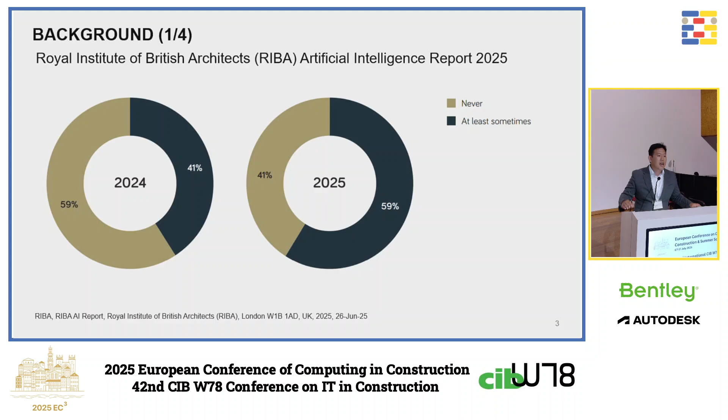According to the AI Report 2025 from the Royal Institute of British Architects, almost 60% of design firms are already using AI in their daily practices. Also in academia, in the recent decade, there have been extensive studies conducted to automate the design processes, not to replace, but to support.

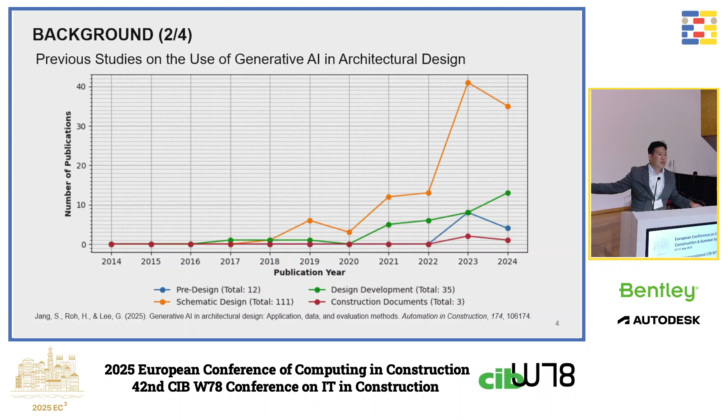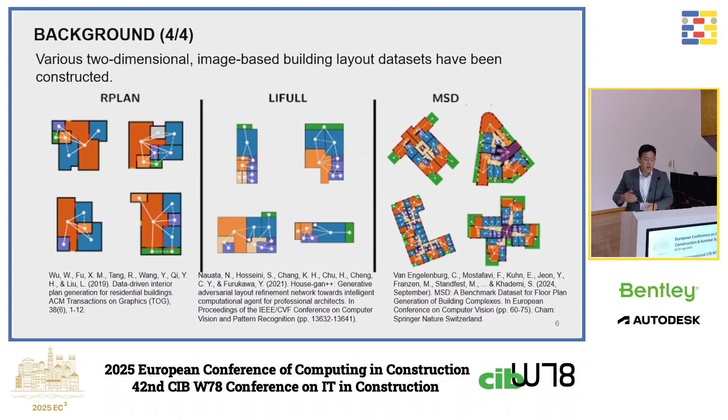But the main focus, almost 70% of the studies, was on schematic design, and particularly building layout generation, which accounted for the largest share of the studies. Various floor plan datasets, including RPLAN, LIFULL, and MSD, were constructed to support this area where building layouts are interpreted and generated, and there has been much dedication from researchers.

However, we still have remaining challenges in utilizing these floor plan-based images to interpret and generate building projects, because image-based plan data often lacks the vertical context and is limited in representing complex variations and configurations of spaces and programs, since we often have multiple floors in a building. And first of all, we have to label the rooms and connections within the images, and that's labor intensive and also error prone.

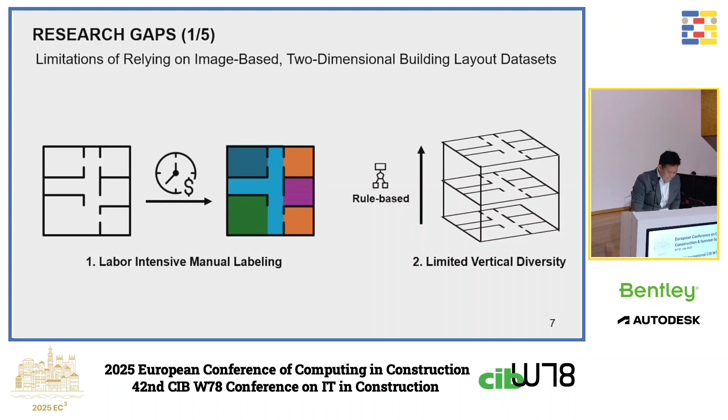So why do we have to make these building descriptions? To provide some background for those who are not familiar with image captioning and generation: nowadays we train generative AI models using extensive datasets of images and their paired descriptions, which we call image captions. In image captioning, we input an image to the AI model and get a relevant description out of it. Conversely, when we give a description and get an image, that's image generation.

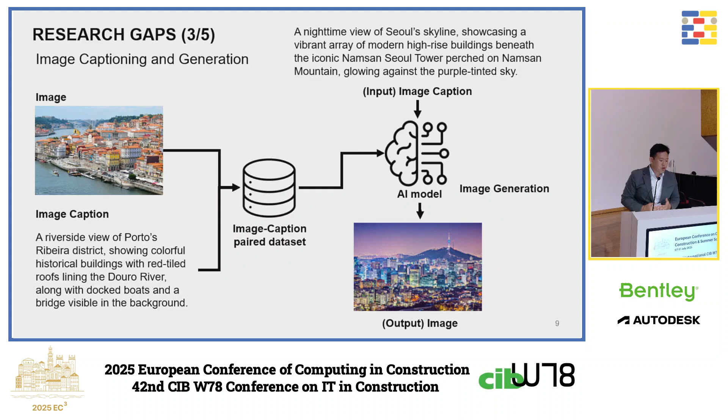So the long-term goal of our project is to enable AI models, given only a description of the project we want, to produce BIM models in the early stage, like LOD 100 or 200, so I can apply what I proposed in my thesis for design detailing automation.

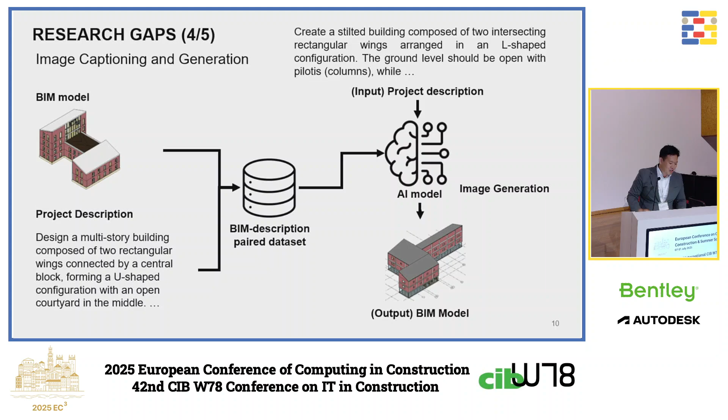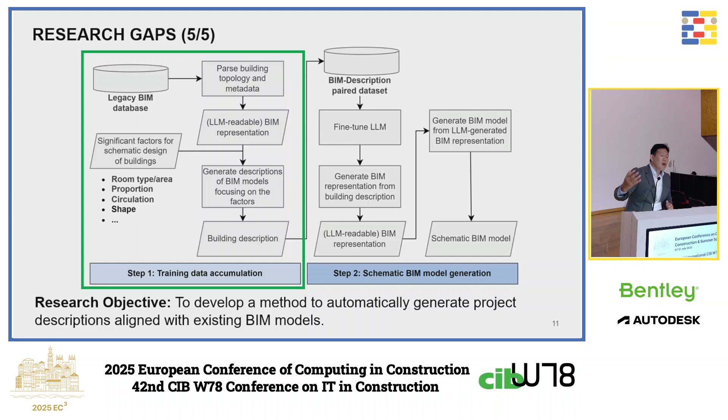Today's presentation is more focused on the earlier stage overall, which is developing a method to automatically generate project descriptions from BIM models that we already have. For example, as was just shown in the last presentation, we already have plenty of BIM models, and now we can utilize them to train AI models.

The proposed method comprises three steps: extracting topological and programmatic metadata, structuring it for LLM interpretation, since I use large language models to make the descriptions, and finally generating building design descriptors relevant to the design characteristics we are interested in when making a new project.

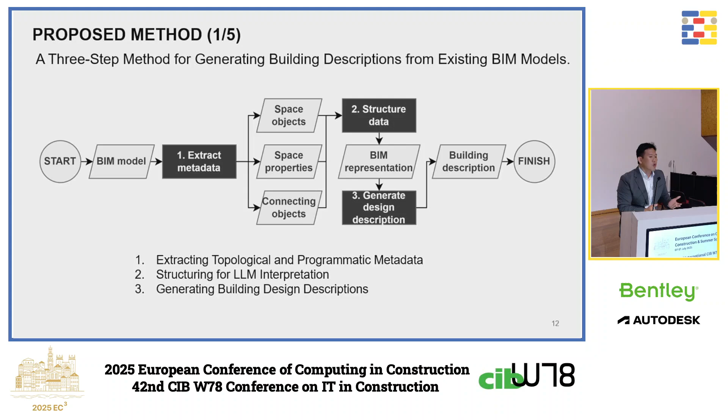So briefly explain the first step. We extract the spatial elements and the connecting elements, which here are windows, doors and stairs, which interconnect spaces like indoors and outdoors, vertically and horizontally.

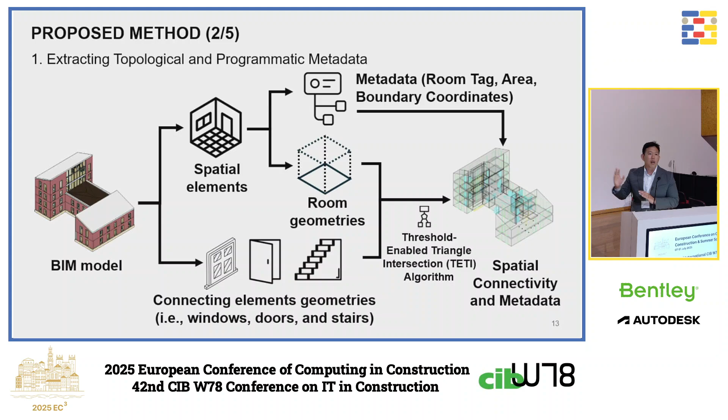And then we parse metadata from spatial elements and also geometries. For the geometry calculation, we utilize a threshold-enabled triangle intersection algorithm, which is just an efficient mesh intersection calculating algorithm. And then we parse the spatial connectivity that is labeled with the metadata.

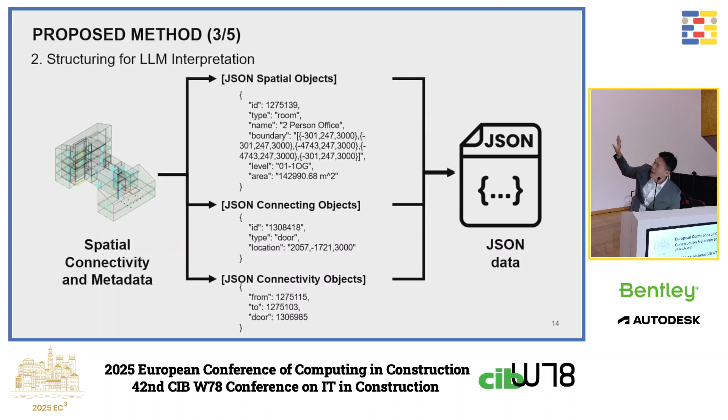Then we utilized JSON as a data format, in which we represented the spatial elements, the connecting elements, and the actual connectivity parsed from the algorithm, all as one JSON file.

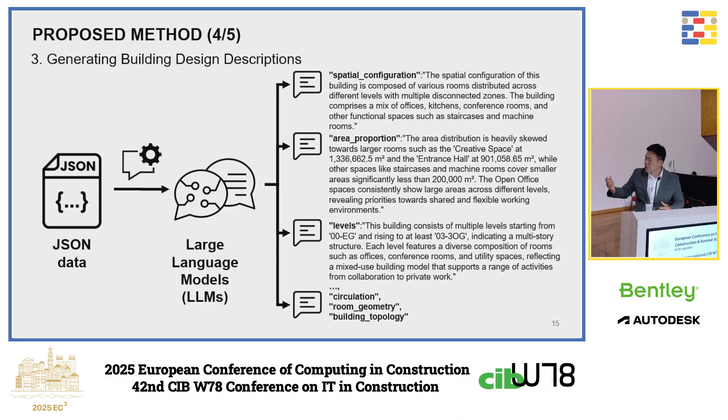And then from the JSON file, we provided large language models the whole file and also instructions related to design characteristics such as spatial configuration, area proportion, levels, circulation and room geometries, which is extensible, but those are what we used in this stage.

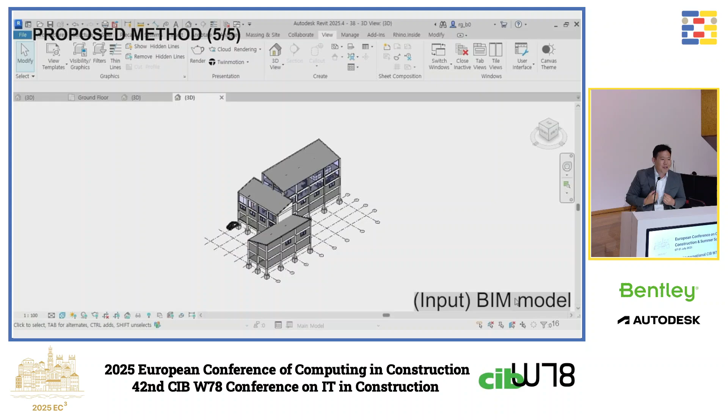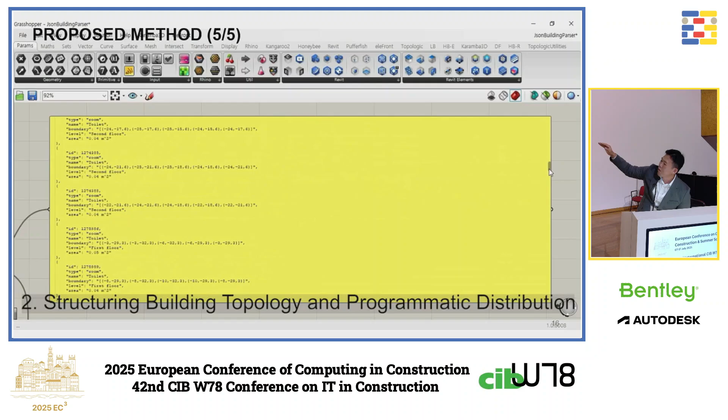And I prepared a simple demo that might explain it better. From this simple BIM model, we can parse the spatial elements, the connecting elements and their connectivity. This is only a visualization, but they're in an extracted format. And then we can structure it as JSON text data, which is easily interpreted by large language models.

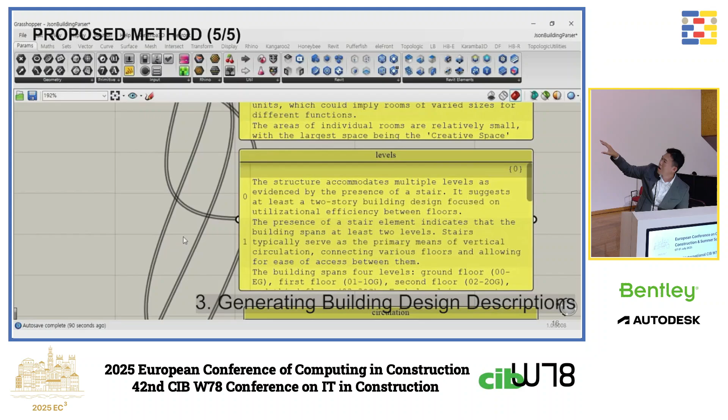Then through instruction prompting, we can parse the design features that we are particularly interested in, such as connectivity, circulation and levels.

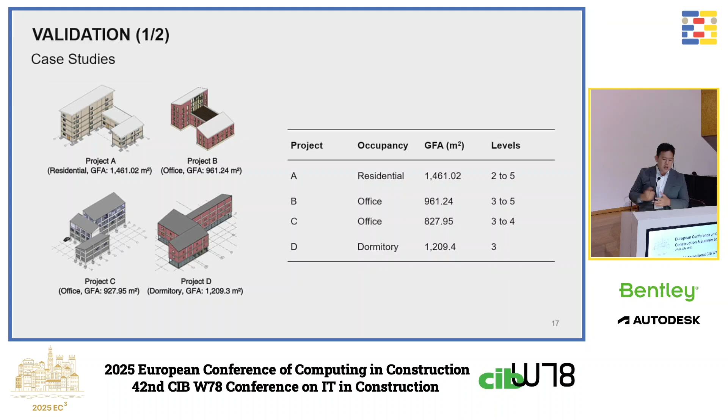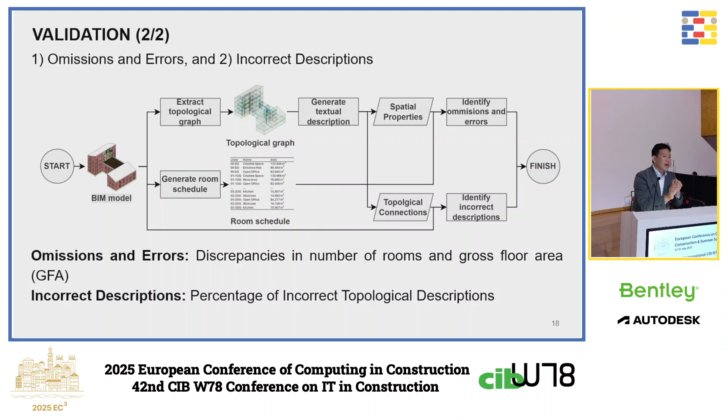We did a simple case study to validate the proposed method. We generated project descriptions from BIM models and evaluated whether there were any omissions or errors in the number of rooms included in the BIM model and in the gross floor area. We also evaluated incorrect descriptions. This wasn't done very robustly, but we looked into all the descriptions generated by large language models and identified where they didn't match the BIM models.

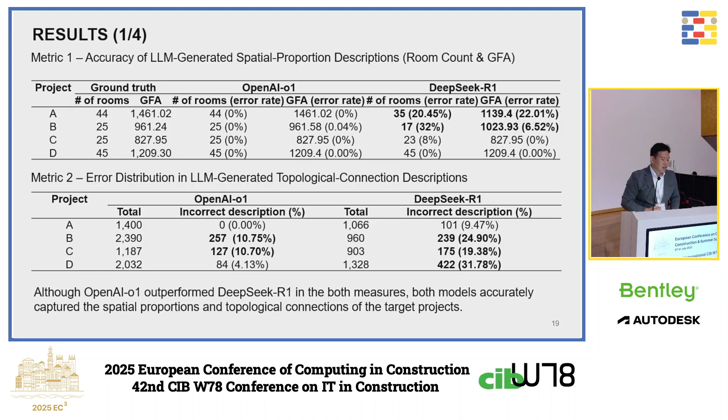From the results, although there were some differences between the selected language models, we could identify the potential that through this method we can get descriptions that actually describe the input BIM model. However, there of course still remains room to improve.

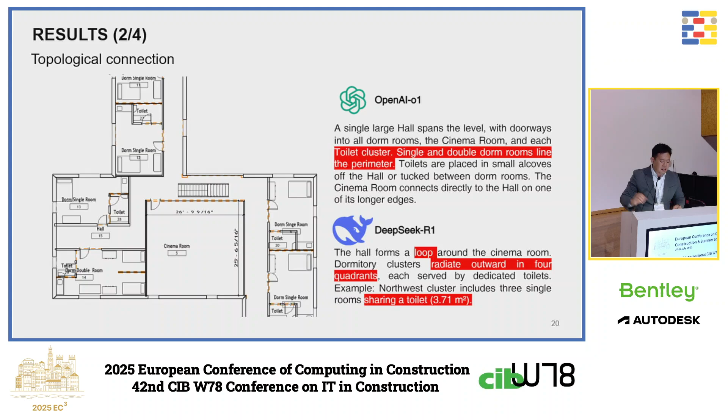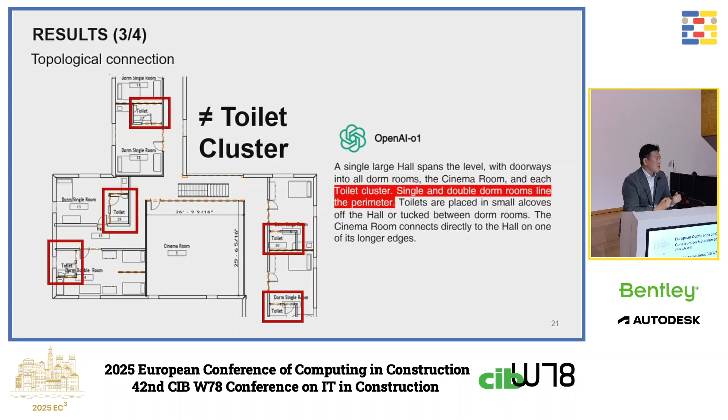Both models were successful in describing the overall configuration of the building and its spaces, but they also had flaws in details. For example, when I used OpenAI-o1 for that project, it described the building as having clustered toilets in the configuration, but the model actually doesn't.

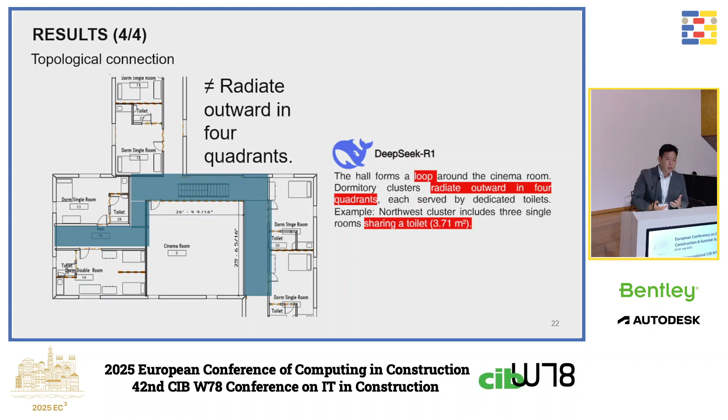DeepSeek was close enough in describing the spaces surrounding a cinema room, but it mentioned a looped plan surrounding it on all four directions, which it actually didn't. Still, we need robustness to use them as training data, so that's something we need to improve more.

So to conclude, we propose a method to automatically generate building descriptions from readily existing BIM models. And as I mentioned, we also have a long-term goal of generating BIM models only from project descriptions that architects or owners might have. I hope to show you some progress on generation in the next presentation.

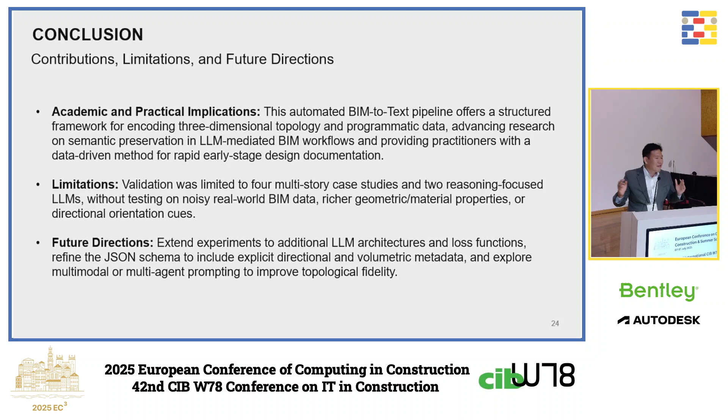Before I conclude my presentation, I want to mention that this work was supported by the Hans Fischer Senior Fellowship Program at the Technical University of Munich, awarded to my supervisor, Professor Lee.